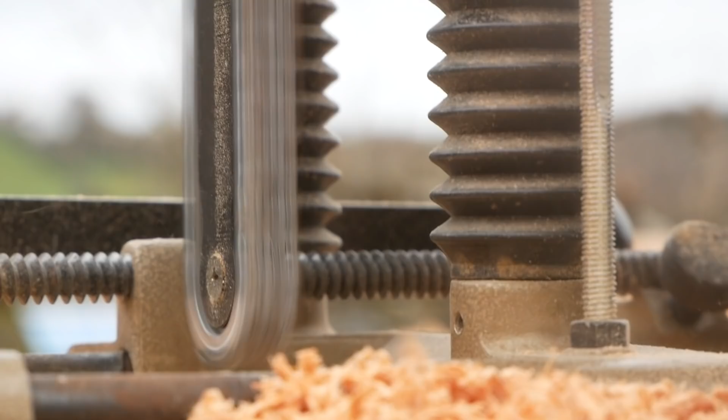Today we're back outside and that can only mean one thing: the chain mortiser is out. So stick around and I'll show you what this thing can do.

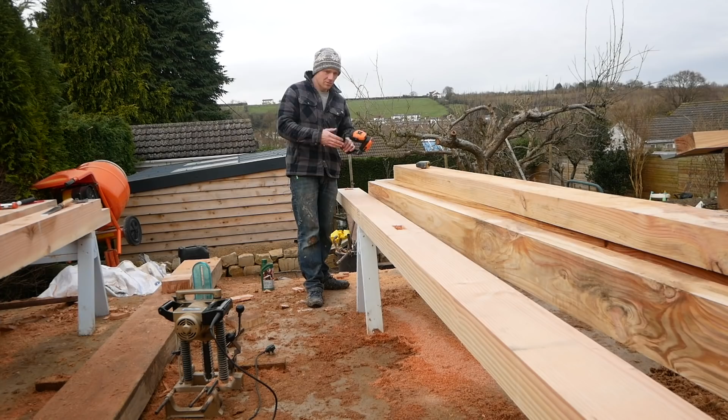Right, it's about time I show you what I've been up to. I'm now at the point that I've got all the west and east mortises done, apart from our two braces each end. I'm going to do them when we come to do the layout. We'll be able to lie them on top and scribe our mortises on from the tenons that we've already cut.

I haven't got the space or the manpower really to be laying up all the beams and doing it all how it should be done. So I'm basically taking measurements from beams where I know they're going to go, making sure that I'm working from the same face, cutting my mortise, and then I'll be cutting my tenons at a later point.

So I've got regular mortises where our regular posts are going to go. 4 posts down this end, 2 on the end, 2 central, basically split into 3 bays. The only difference is on this east wall, I've got an extra stud. I'm using one of the smaller timbers, which is a 4x7, and that'll just create the stud to frame our

door frame. And then this section here, we won't have, but I'm going to leave it all in for now, and I'll probably cut it out once it's in place, a bit like you might do with a stud wall. Then we know everything's straight, and everything will be bolted down to the slab anyway.

So the next job is going to be to cut some half laps on the sole sill floor beam. That is going to go all the way around, and on the corners where they sit on top of each other, I'm going to put a half lap. It's really simple, it's not particularly structural, so it's going to be just fine.

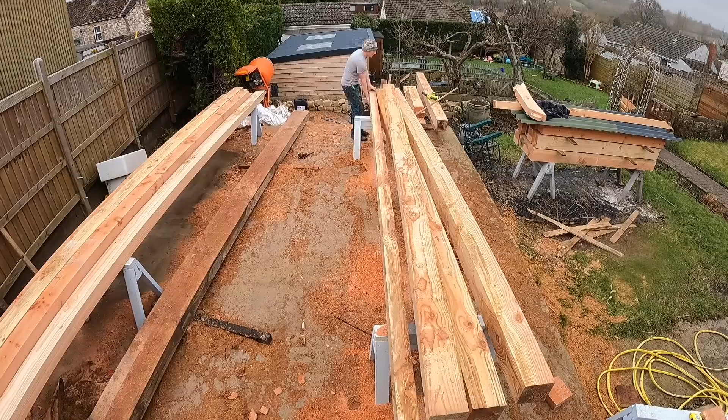Now, the last thing I did before I came in was cleared the whole slab, which isn't that easy with timbers that size. Stacked them off the slab, apart from the 4 ones that I'm going to be working on the soonest.

But I managed to lever and roll and get them off the slab so I can sort out our foundations. And when I say foundations, I don't mean the structural side of things, because we've got a huge whopping great slab there that's perfectly adequate for a building like this.

The problem is that because the lawn slopes beside it and the ground slopes, we're fine and up above the ground level at one end, but up this end where we've got the concrete path and the gate, there's a channel drain, but it's pretty much level with the path. That means that if there was a backup of water on that path, channel drain overflow, anything like that, it could work its way to the timbers.

Now I've got to decide whether I want to build a wall all the way around for the frame to sit on. In hindsight, I would have probably done the groundworks in a different way - a standard foundation, strip foundation or whatever, to build our wall up to a certain height, then dealt with the slab inside that. Instead, I've done almost a raft. It's much thicker at the edges, it's reinforced, and it's not going anywhere.

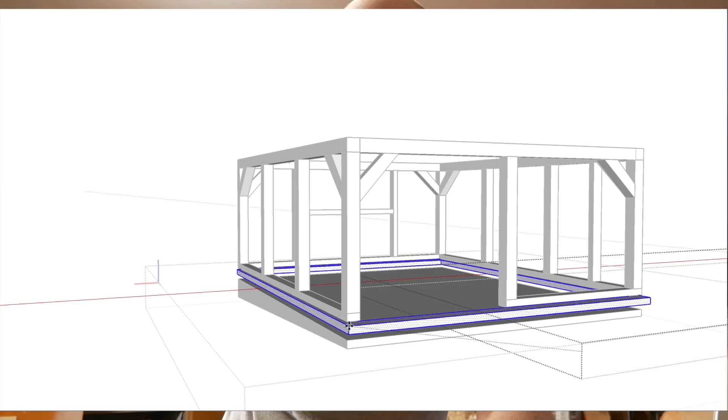But because of the height issues, we are going to have a slight problem or slight risk. Therefore, I'm considering picking up a bunch of concrete blocks and laying those on the bed on the flat side, so we're only going to be up 100mm, which is adequate. I'll roll the DPM under there, just so it's kind of continuous, and then on top of that block work, I'll put a DPC before our timber.

So it means we're going to have to take a break from woodwork and dust off the trowel and see if we can get a nice level bed.

There is one other small benefit, because when I floated out the slab, there's a little bit of variation right at the edge. It's easier to do the bull float in the middle, but when you get to the edge you end up with a little bit of a lip sometimes. I was going to grind that down, but instead our bed of mortar will kind of account for that, so we should actually come out okay.

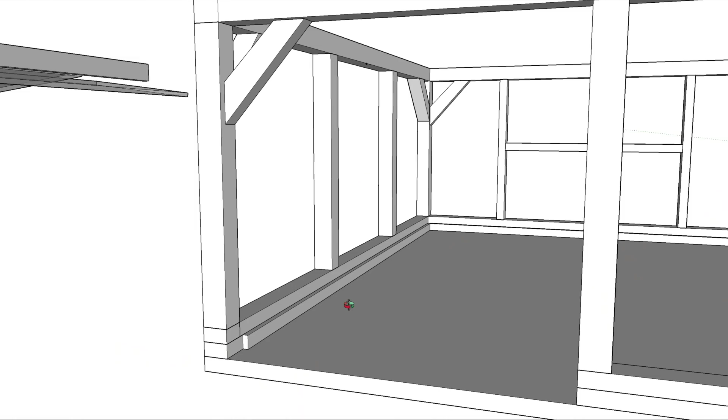My only problem is that blocks are 9 inches and we are 7 inches. Now, because our insulation and cladding is going to be continuous down beyond the slab level, certainly further on where the slab is much higher than the ground, I'd rather carry that insulation down the outside. I can't really put that step on the outside, which means it's got to be on the inside.

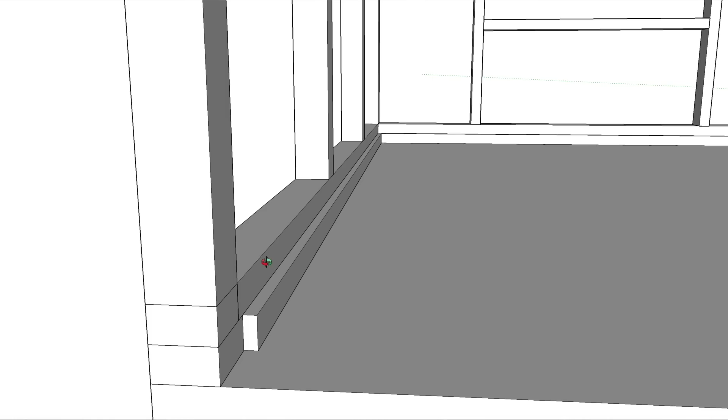Which means we're going to have a 40mm little bit of wall. It'll be hidden pretty much everywhere, but in some areas it will just mean that things on wheels and casters, the bandsaw and things like that, are going to be into the room a little bit more. I know it's pretty petty, but all these incremental measurements add up, and we're essentially losing 80mm off our floor space by doing this. Anyway, fairly good progress made today.